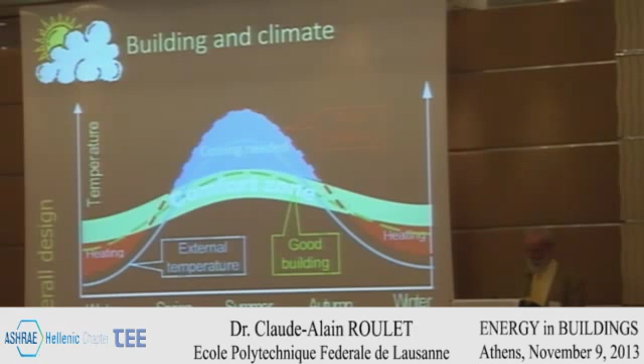If I take a poor building, it will always be warmer than outdoors because of internal gains. In summertime, it could be very uncomfortable without cooling, and in winter, also very uncomfortable without heating. It's possible, I will show you, in the Mediterranean area to have buildings that are nearly all the time within the comfort zone. That's what I call a good building. And of course, the cooling season and the heating season of a poor building are much longer than for a well-designed building.

Energy and indoor environment quality: I heard some people say, well, new insulated buildings are less comfortable because we have mold growth problems or poor indoor quality and so on. This was true for some buildings, unfortunately, for example the 100 dwellings I spoke about 10 minutes ago. But this results from past errors: just after the oil crisis, the only purpose was save energy, save energy. If you have only one objective in mind, you can make a lot of errors.

We are obliged, in buildings at least, and for many other activities, to have a large view. It's the task of the designer to take every stake into account. And that's the difficult task of the architect. That's why I admire them. I'm a physicist. And you can see in the paper, which should be or will be on the site, I put a table of many ways to improve at the same time indoor environment quality and energy efficiency in buildings.

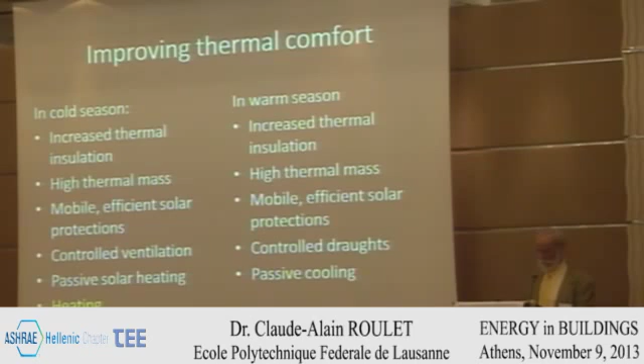I mean, ventilate a lot during the night, during the cold part of the day, in order to cool down the building at a comfortable level, so that the building has a peak temperature the day afterwards much lower than without this system. And finally, you can use mechanical cooling.

You see there that 3 lines are identical in winter and summer, and we are lucky: we don't have to change the building between winter and summer, we don't have to have a summer building and a winter building. The passive design helps you to stay in your house the whole year long. That's good luck.

An important point about thermal comfort is the requirement for thermal comfort. There was a big audit within ASHRAE. They audited several ASHRAE chapters in many countries all around the world, audited 160 buildings, looked at which is the comfortable temperature from the occupant point of view in this building. At the same time, they measured the average outdoor temperature.

And in air-conditioned buildings, 1 point represents 1 building. It's a big dispersion, but they are more or less aligned along a blue line, which is adjusted. The blue line is the mean square difference line aligned on these points. And the yellow line is the prediction of the Fanger model, the ISO 7730 standard for conditioned buildings. And they fit very well.

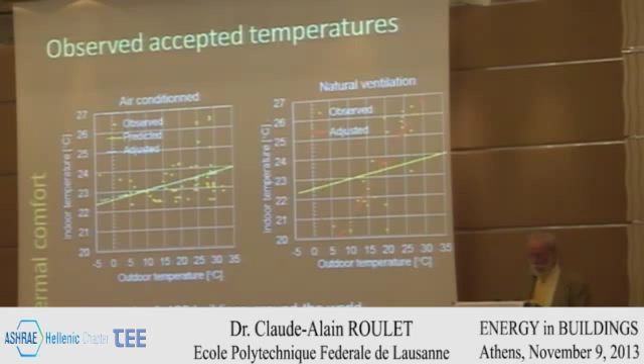This diagram, taken from a paper from de Dear and Brager, clearly shows that ISO 7730 doesn't apply to naturally ventilated, free running buildings. And therefore, we have 2 comfort models. One, ISO 7730 for conditioned spaces that are either heated or cooled, and the work of de Dear, Brager, Nicol, and many other people, I was not among them, that resulted in an annex in European standard 15251 for free running spaces.

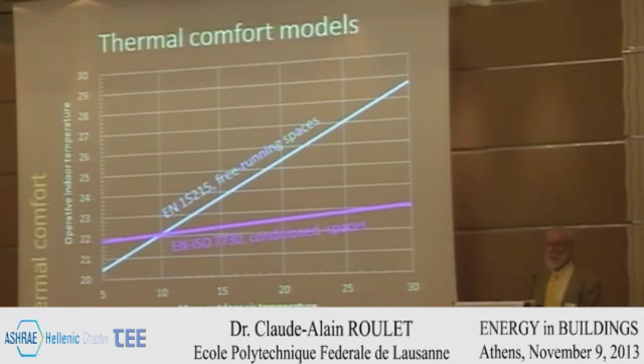These lines are just optimal comfort lines. If both lines have a slope, it's because in summer we have less clothes than in winter. These are ideal comfort lines, but of course we have some tolerance margin around these, plus minus 10% dissatisfied, for example. And this is the comfort range for office buildings or living rooms in residential buildings for sedentary activity.

And this one is for free running, naturally ventilated buildings. The area up there in summer is comfortable if the building is naturally ventilated. It's no more comfortable as soon as you install HVAC or cooling. I know I'm not in favor with ASHRAE, with HVAC engineers, because I recommend not to install cooling whenever possible.

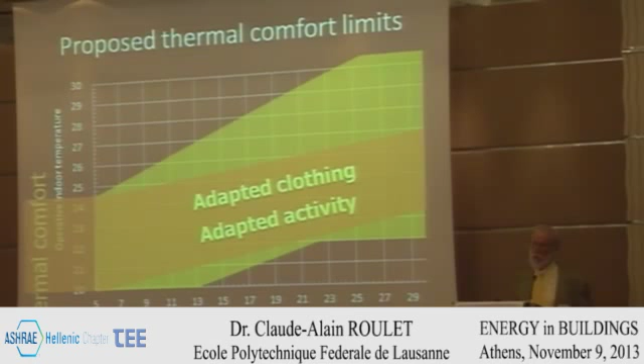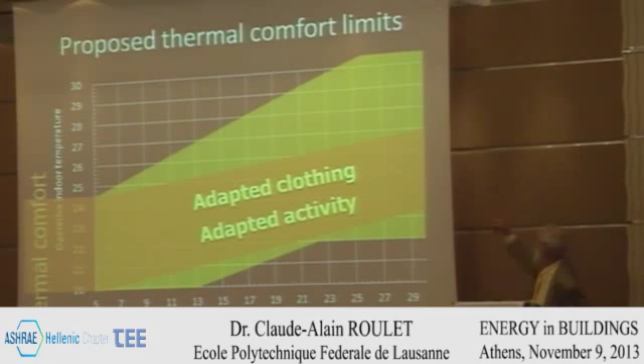Of course, when it's too cold, the conditions are those of conditioned buildings, because when it's too cold, we have to heat the building. But in summertime, there is a big energy-saving potential with a good comfort. People are satisfied in the green area, and we need much less energy. I will show you that with a few examples on the basis of a single office building.

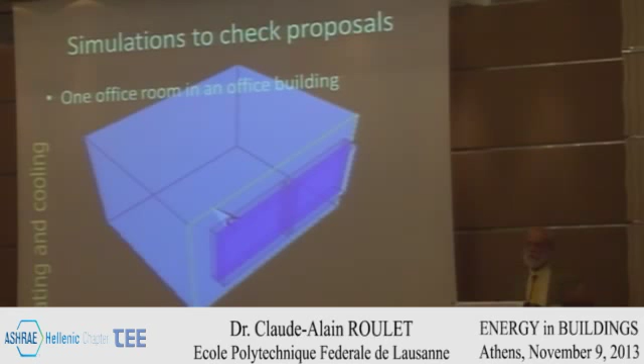This single office room with windows on the south facade. And this room is surrounded by identical rooms, so that makes the model simpler, the simulation simple for me, and it's just for an example. It's 5 meters wide, 4 meters deep, 3 meters high. I used DIAL+ for simulation.

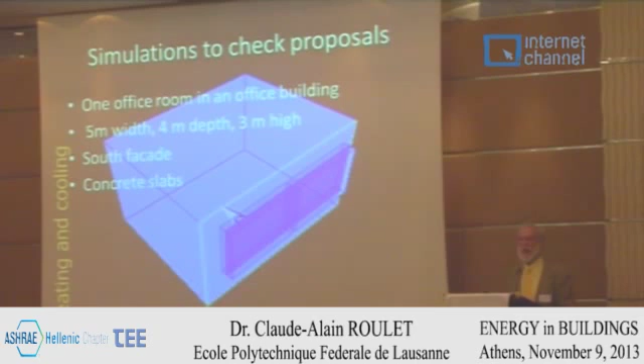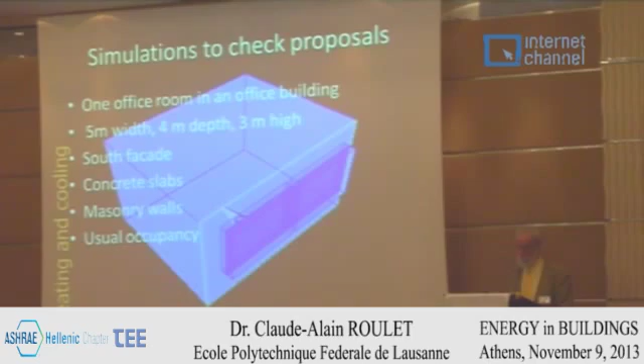This room has a massive construction, concrete slabs, masonry walls, including the facade. It's important. And I introduced there the usual occupancy, just for an example. What I changed in the simulation is first the insulation level. First is a typical building here, no insulation, single pane windows. So the walls are made of masonry and that's it.

Second, I added outdoors 5 centimeter thick insulation and double pane, ordinary double pane glazing without any infrared coating, for example. And third example is 10 centimeter external thermal insulation with good glazing with selective coating.

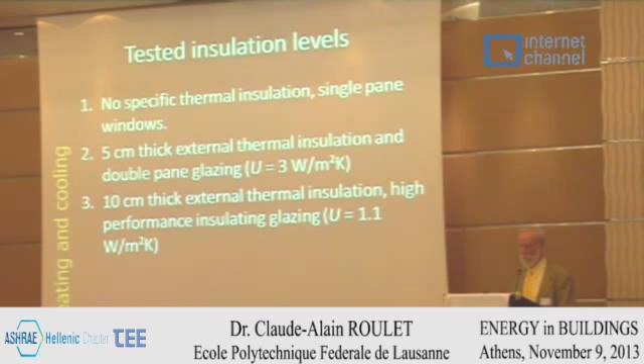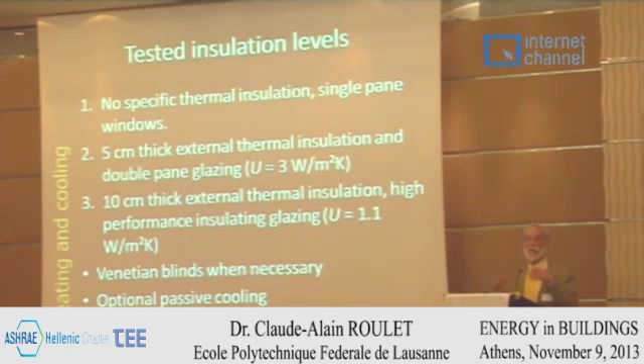Why the running mean? In the adaptive comfort model, the people who developed this model have seen that we need some time, a couple of days, before feeling too hot. The first hot day, well, we're happy. Finally, we have nice weather and it's warmer. But after several hot days, we begin to complain. So they take the running mean to smooth a little bit the peak temperatures.

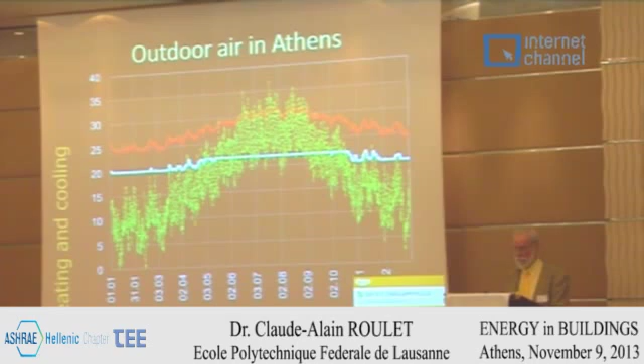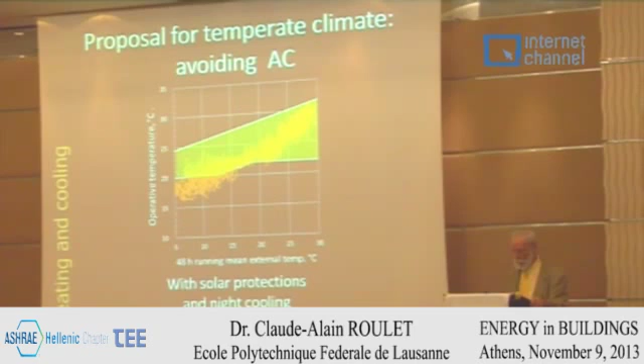And with solar protection, night cooling, with a middle, slightly insulated building, I don't need AC anymore. There are no more hours above the upper limit for normal internal load. Of course, if there are many people in that building or high activity, air conditioning may be needed. We still need some heating.

But to reduce heating, I just take a building with solar protection, with night cooling for the summer, and look what happens in winter with thermal insulation. Without thermal insulation, there are many cold hours if there is no heating. With a little bit of insulation, the number of cold hours is reduced, and the minimum temperature is strongly raised. It's 16 degrees, nearly comfortable.

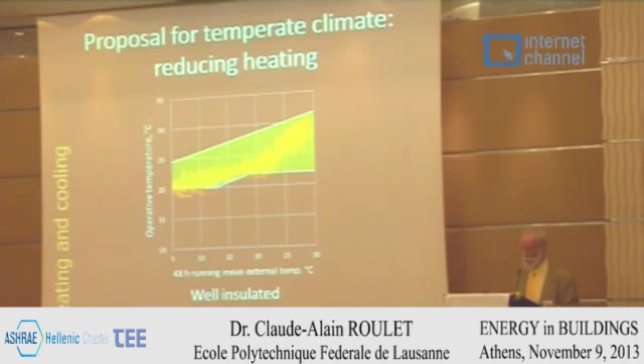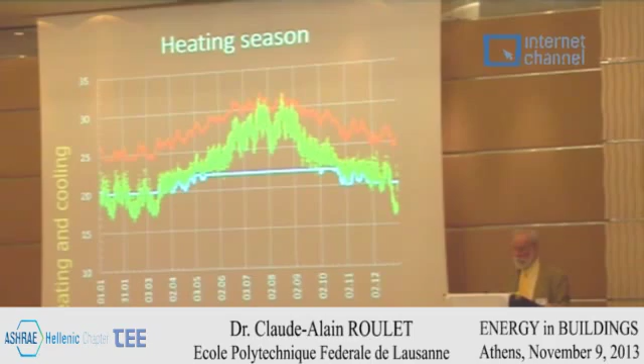And with 10 centimeter insulation, good glazing, most of the hours are within the comfort zone. We need only a little bit of heating during the winter. This with Athens climate. The same thing for the season. Without insulation, the heating season goes from November to April, May. A little insulation, it's December until March. And with good thermal insulation, a few hours in December, January, and February.

And that's the main effect of thermal insulation. We have also seen that at the LESO building. The heating season in the LESO building, which is a good passive solar building, is strongly reduced when compared to ordinary Swiss buildings.

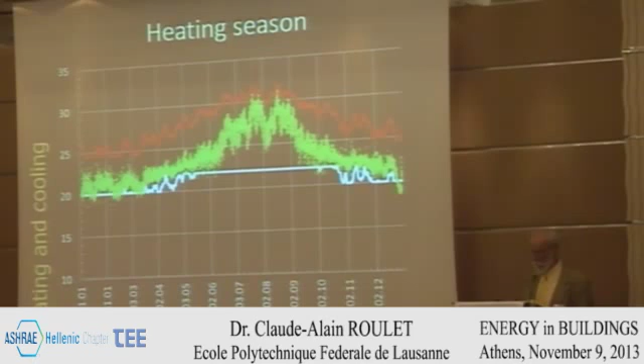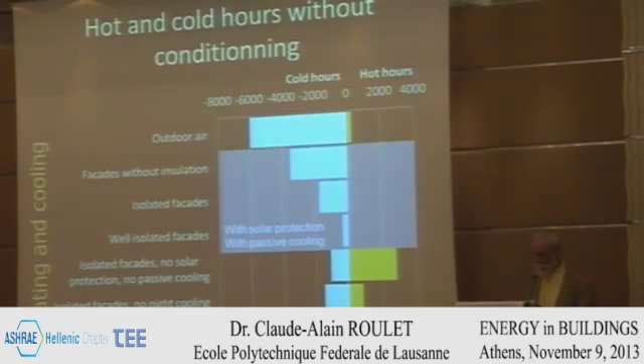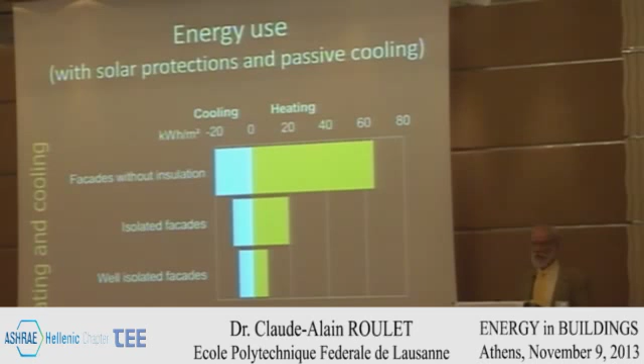And from an energy point of view, the effect of insulation with solar protection and night cooling, we can see the dramatic reduction of energy use when increasing the thermal insulation. This is for the climate of Athens. It's very likely more or less the same situation all around the Mediterranean. Of course, in North Africa, it could be a little bit changed, but there is an advantage. I've seen, for example, for South Algeria, there is still an advantage to have some thermal insulation. I'm not a salesman of thermal insulation, I would say.

Finally, as a conclusion, my first proposal for Mediterranean climate is to take advantage of the adaptive comfort model developed and normalized in EN 15251 for naturally ventilated buildings. In Switzerland, we are now adopting a new version of a comfort standard, saying that all buildings should be designed to be comfortable all over the year

without cooling. If you can't because of internal load, not because of solar load, but of internal load, then you can use artificial cooling. Of course, Switzerland is colder than here, so I will not recommend that standard, but at least take advantage of this possibility to not install cooling. And also, of course, use passive design. I will not go through that list because you have seen it several times today, and very likely you all know the base of passive design.